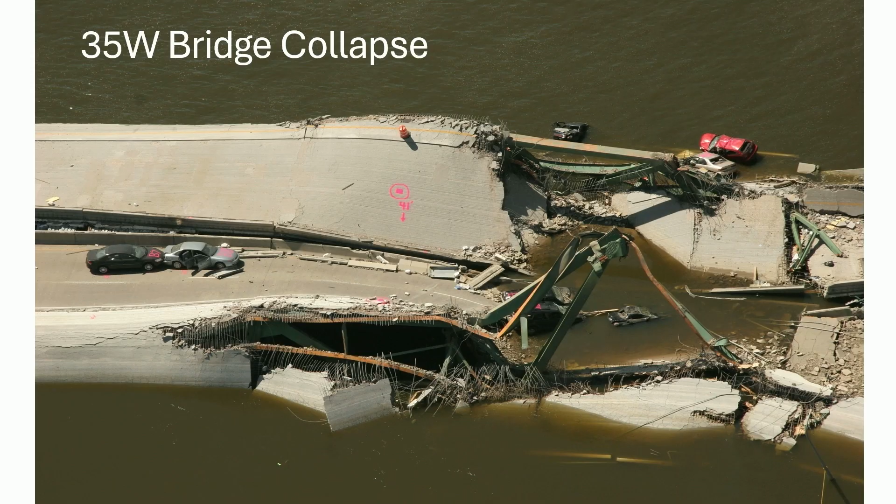Part of my background was, if you remember, we had a bridge fall down in Minneapolis. It's safe to drive on, you're good to go, and I was assigned this project. I don't normally have this kind of stormwater pollution prevention plan design, but this was weird, and part of it is that when the bridge fell down, it broke into a Superfund site that was left behind by the railroad person named James J. Hill. And it was a gasification pollutant area, and that's what we punched through, with mercury as the main pollutant of concern.

So those orange things that you see there, I'm using what's called, they called it ceramic peat, but I'm pretty sure it was biochar. We didn't have the word biochar in our lexicon, so they basically used high temperature peat, and it was designed to trap all divalent cations, and that was what I wanted.

So that was really cool stuff, and MnDOT let me put it in sleeves, so I had it everywhere. But it was only because the federal government paid for everything. Otherwise it'd have been a fight, because I didn't have it as a standard for this. But that's what I did, and that was the beginning of using three-dimensionality of things to try to remove pollutants in a flow line.

And so I need your help, and this is where I'm going to burn up some time here, but I've asked everyone on planet Earth, do you have a design manual? Do you have a design manual for maybe one topic? So we just heard maybe on some bio-retention stuff. Okay, fine. But I can't find much of anything.

And if we're going to make progress in using biochar in the world, you've got to start with good design. Because if it ain't in the plan, it ain't going to happen. You can argue all you want. You can give it away for free, and I still won't put it in. It's got to be in the contract.

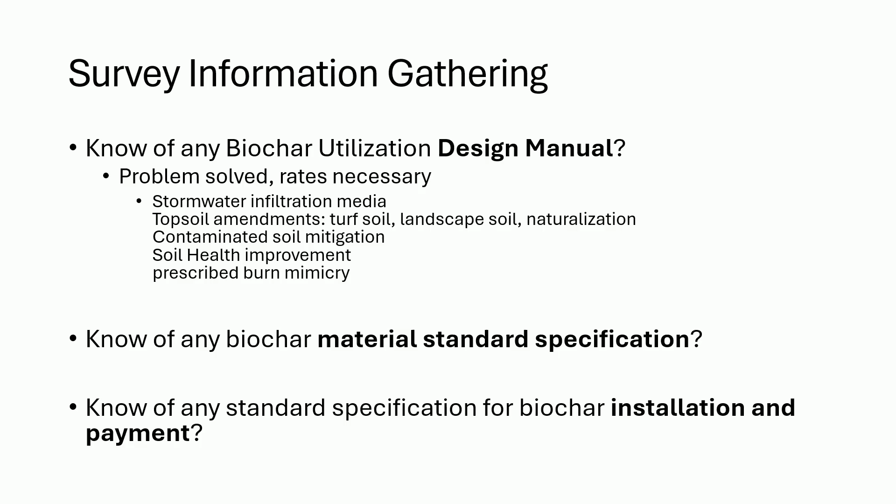I love it. Maybe it's 4 R's, maybe there's 5 R's. Righteousness might be the another R here. And so if you're interested, and if you have information, please consider talking and taking a survey.

So I've got a research project where I hired a consultant to find out if anyone on planet Earth -- I'll even take the universe, if you've got something from Mars or Venus or anyplace else -- I really am looking for: do you have anything on how to design for it? You just heard it earlier, for landscaping, for stormwater, for the myriad of things that were just mentioned.

But it doesn't happen by just love and luck. In fact, there's no love in my world. It's work, and it's called work for a reason. You don't go to love. How many came here today for love? Okay, one. Yeah, I know. A couple of you, yeah. I could use a hug, I'm telling you.

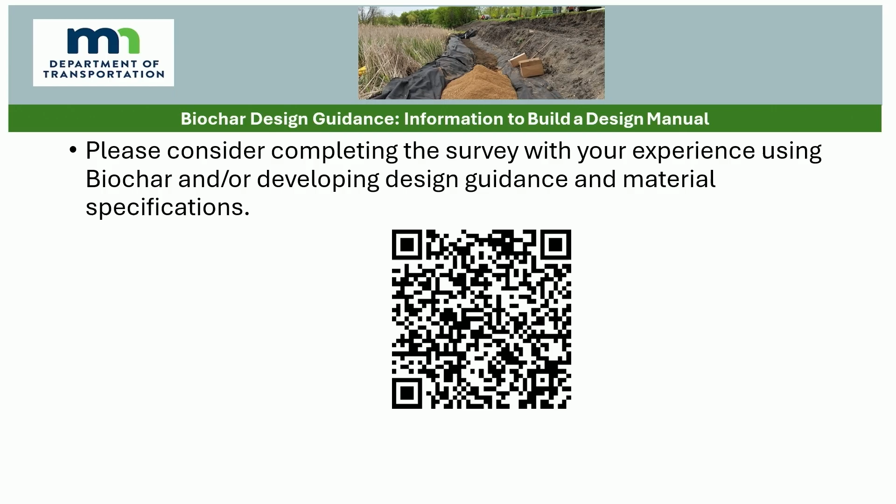So I have a spec. I don't care whether you like it or not. And the moment I write something at the DOT, y'all hate it. But you have to write something for you to hate it, right? So until I write something -- there's no specs that I can find.

So what I have is class 0. It could be grade, it could be another name, but right now I'm calling it a class. It could be a type -- men always label things. And that's no testing area. So it's the same feedstock. It's always going to be hardwoods at this point, because that's all the research I've got from Dr. Brian Berry, and we've got a representative here.

And then class 1 is maybe for road base and pavements. That might still be true. And you'll hear a presentation -- there's even someone from concrete here, maybe he left already on me. And then there's the general soil additive or general additive.

So that's class 2, and that's what I'm going to talk about for temporary sediment control. But that would be just something as a soil amendment. I'm not going to ever get credit for anything -- get over that, it's solving a problem. And if the contractor might get some CO2 credits for installing it in construction, MnDOT won't, because it's a state agency. And then I've got 2 classes of 3.

3A is nutrient-enhanced additives, that's different than just adding it to soil and hoping. And each time you'll see -- you can't read it, but I'm testing for more and more things. As you test for more things, like all the EPA heavy metals and PCDDs and all those other things, the cost goes up. And then class 3B is stormwater, and that's the highest level of testing.

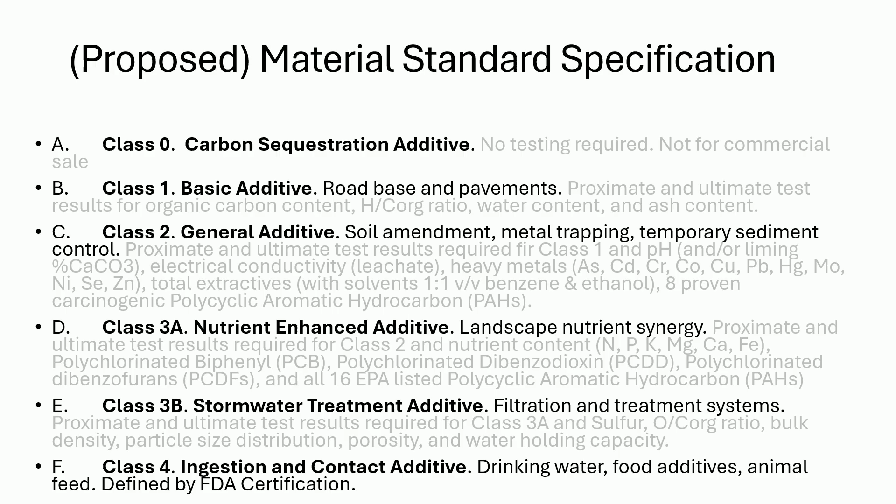Now, there's some really neat industrial things that spin, and curtain, flamey things, and all sorts of cool stuff out in the show. But most of these flame things -- no, you don't really know. But it might be just fine for class 0, 1, and 2, but not for 3. You need more data, and of course, as the testing goes up, the cost goes up. But then it's supposed to be solving a problem.

All right, so now we're finally getting into what I'm supposed to talk about. That was my commercial. You got any cool things, let me know.

And we have active systems when we're dealing with contaminated soil, so I'm using biochar in projects that have excessive contamination.

I'll say more about it. So sometimes we put it into a pond that gets contaminated, called road runoff. Copper, zinc, chromium, cadmium, everything that comes out of a tailpipe, everything that comes off a car. Over time in Minnesota we rust a lot of things, so by the time you're done driving it, the rubber's gone, the road's gone, the car's missing. It's all someplace though, because roads wear out, tires wear out. It all goes someplace, so 6PPD-quinone is going someplace.

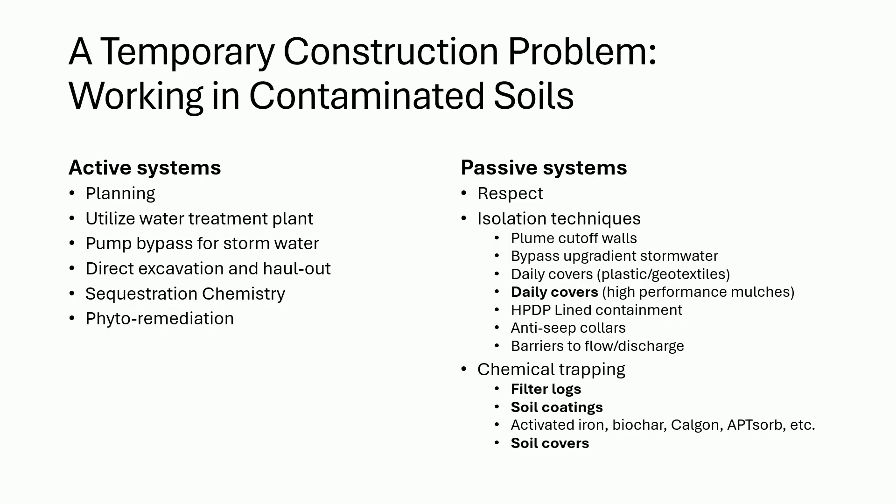Then the idea of passive systems, and I'm going to be focusing today on chemical trapping - filter logs, soil coatings, and soil covers. I'll give you a whole bunch of things I want to do or plan on doing and have no idea if they work, because I can't get anyone to research it without money. You won't do research for me for free - isn't that weird? You actually want to get a pretty good wage, not minimum. Well, it'd be fun to have Dr. Berry working at minimum wage, eh? Yeah, that ain't going to happen.

So in most projects where I've got known contaminants - we drill a lot of holes, find all the contamination, I might have these metals as an example - we label the soils green, yellow, and red. Can you tell me what you think red soils mean? Bad, you can't reuse it. Yellow is bad, but it's reusable - you can entomb it into the road base, behind concrete walls.

We're never growing tomatoes on a roadside, so it isn't one of those things. I'm not supposed to be playing there - hopefully parents are watching their children, because I don't think you should be playing on the freeway. When I was growing up, my dad said, go play on the freeway. You're all younger than that, I know, but that was his way of getting rid of me - go play on the freeway. At least someone laughed - thank you, I appreciate that.

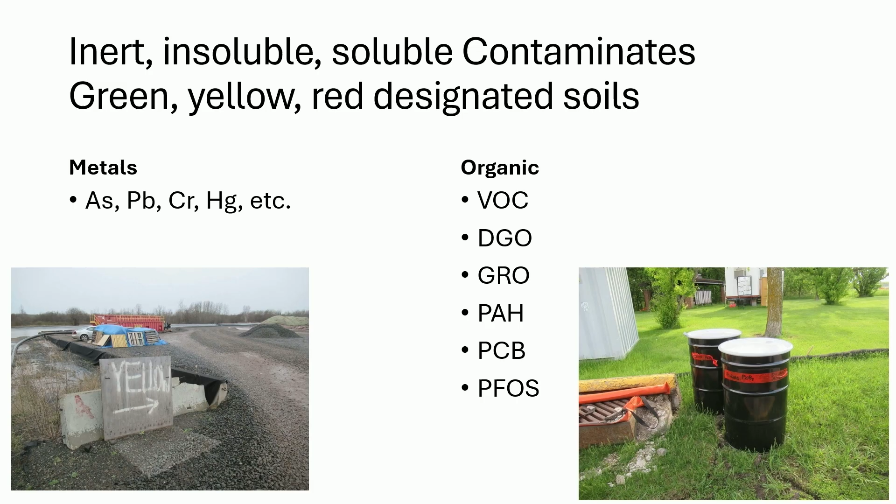So this is a sign, this is a real project. It's in the Duluth area - an old industrial corridor, railroad, and everything started at the beginning of Duluth. We have the same thing in Minneapolis. Industry started, and we didn't have a lot of pollution control, and things happened. Anyway, that's an example of what I'm having to deal with.

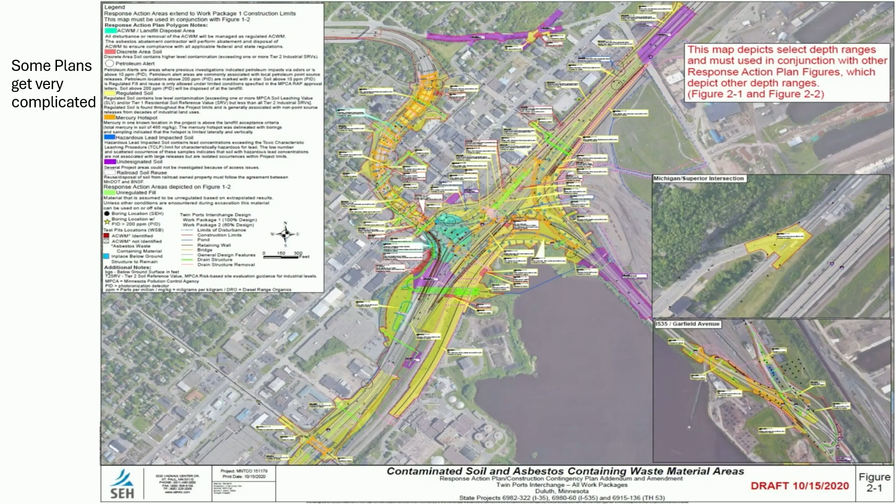And if the thing drains to a hole, the soils, if it gets contaminated groundwater or rainwater falls into it, we have to treat the water. We basically bring in portable water treatment plants. I'll show you that. But what if the water can't go in the hole?

And I know America loves this kind of thing, because it's what I see - if you don't test it, it's safe. So it's best not to know. But when we do know, then we've got to respond.

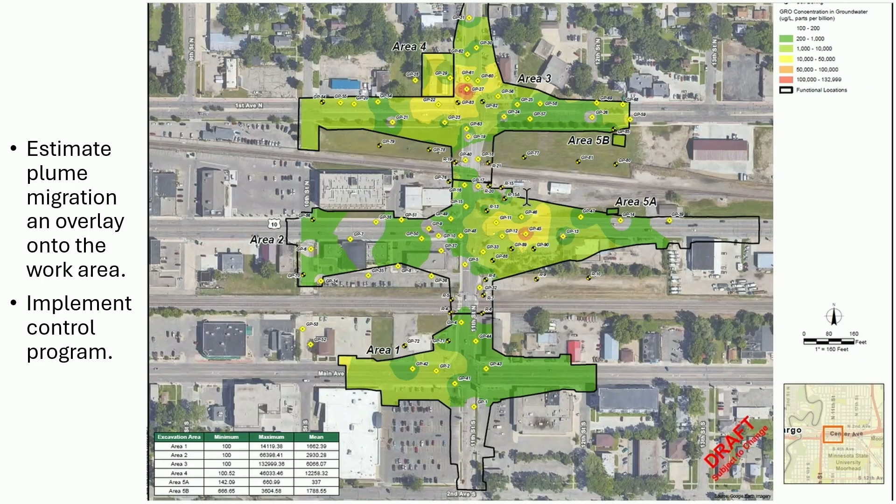So these are examples of plumes, and this is a real project - Trunk Highway 10. If you go to Moorhead, you can't miss it, it's under direct construction right now. And you know, things happen. Then you got these things that look red like a target - ooh, you know that means this bad stuff is migrating. Oh, isn't that fun? So we bring out a water treatment plant.

And the water treatment plant consists of something like this. Uses a lot of electricity, 480 volts, 3-phase - when you turn that thing on, this whole city turns dark. It's a big, a lot of energy use. But we have to go through - you'll see in here we've got sand pots, chemicals called flocculants, reverse osmosis, activated carbon (not biochar, but activated carbon), going through various settling tanks, oil-water separators. Basically what you're looking at here is $7 million. This is one project. That's just for the water we can get.

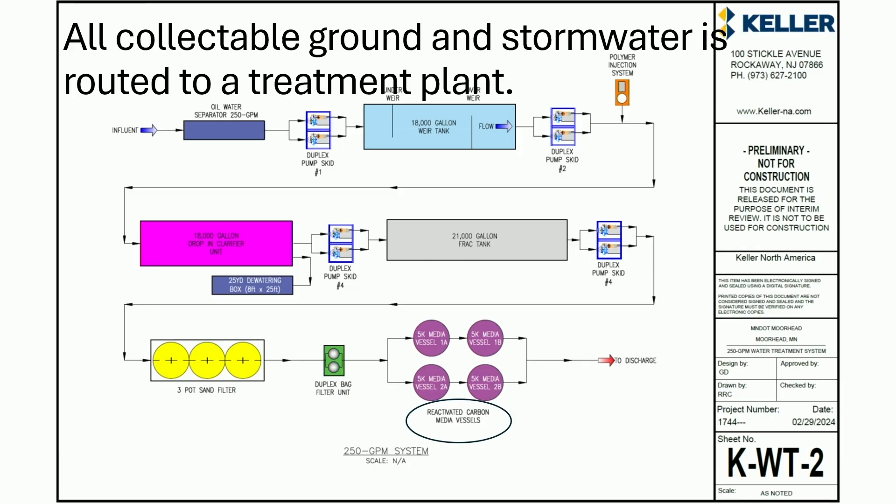So again, these are all the connected things - it's all on a bunch of trailers. It takes an expert to set it up. And hopefully when you're done, you get the water clean enough to meet federal standards to go to the sanitary system of the city. You still can't go into stormwater - it's an entirely different permit. And you guys are worried about some biochar in a farm field and a few places over here - this is my world. Now when I'm done, how many think the soils are still contaminated?

Well, some of you are shaking yes. Not all the water can be treated by putting it into a hole, because you have to drive into the project. So far we don't use helicopters to build any project, so you can't just helicopter in and out. You've got to drive in, dig soils, haul them out, and stuff falls into trucks, falls out of trucks, falls on tires, falls all sorts of places.

So I've got to deal with exits, haul roads, slopes and perimeters that don't drain back into the hole that I can pump and treat. It drains to curb, gutter, pipe, and river. And stockpiles - you don't just build, you have to put stuff over there and construct around it.

And then I have a whole bunch of other things, like the city's stormwater system, and we connect to those. We don't just have our own pipes, we connect to other people's pipes.

How many have seen a building being demolished? Or a bridge being demolished? Isn't that fun, blow the sucker up? That's so much fun. But how many think it generates a lot of dust blowing up a bridge or a building, say in downtown Minneapolis? So they use water.

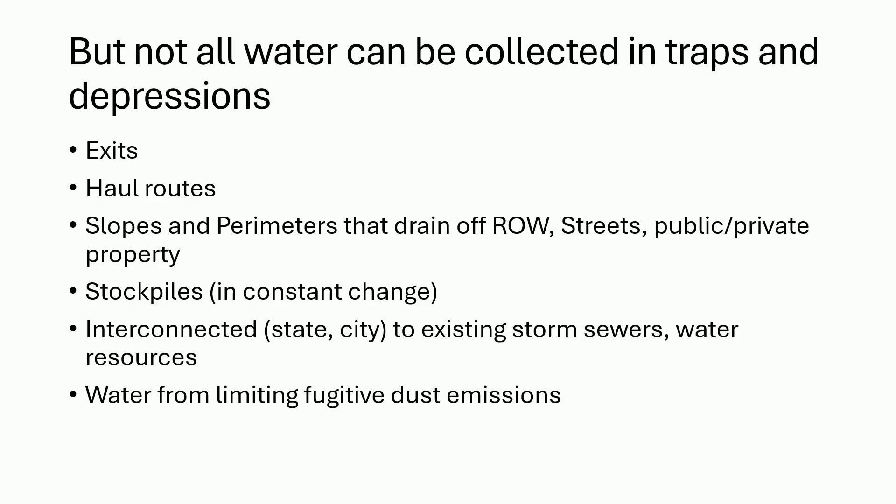But remember, that building could still have asbestos in it, mercury, and all sorts of other cool things, and then you use water. Now you've got water all over the place. And where does water go when it rains, that you've just put on the ground for dust control? Well, someplace, of course.

So here's an example - you don't know what you're looking at, but I'm going to tell you. This is an example where the yellow soils, our red soils, would go. It's a stockpile that meets EPA requirements - it's got a plastic liner, high performance perimeter control, not wimpy stuff, and a daily cover. So when you can't do a direct haul to the landfill that'll take this waste, you've got to store it someplace.

Well, have you ever seen a contractor get it all right all the time? Like it'll never rain, it'll never blow in? So plastic blows off, and things happen. Now I'm driving a truck in there and putting what kind of dirt on the tires when that's full of regulated arsenic contaminated soil? I'm tracking it all. But not to worry, I'll take a sweeper then. But no sweeper's ever been invented for construction track-out.

It's good for leaves and grass clippings. It's really good for MS4 compliance, but it doesn't do anything for dirt pickup. It's a good smearing device though - oh man, it smears good.

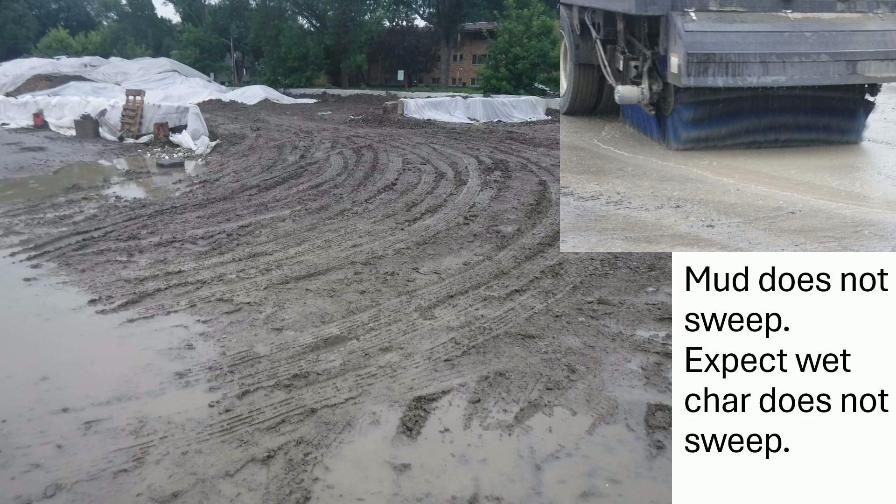So here's an example - it just happened to rain, same contaminated stockpile area. What do you think that soil consists of, and how do you think I'm supposed to handle it? La la la, live for today. Remember, I hear nothing, see nothing, speak nothing, right? So what are you going to do about it? Well, you don't live here. Whoa, that was a good one - man, that was close, I could have been contaminated.

Their children, their families - so this is where the biochar would go. It gets incorporated into these soils, and this is temporary - when I'm done, it goes back into the pile, and you haul it away and bring up some more char. How long does the char last before all the arsenic, lead, mercury, chromium, VOCs, PCBs are absorbed? I have no idea - nobody wants to test for that, so I just put some down and replace it.

Then I have a rule, but I don't know if it's a good rule - for every 2 inches of accumulated rain, you replace the media. It's a number, and I can enforce that, because we do know it rains sometimes in Minnesota.

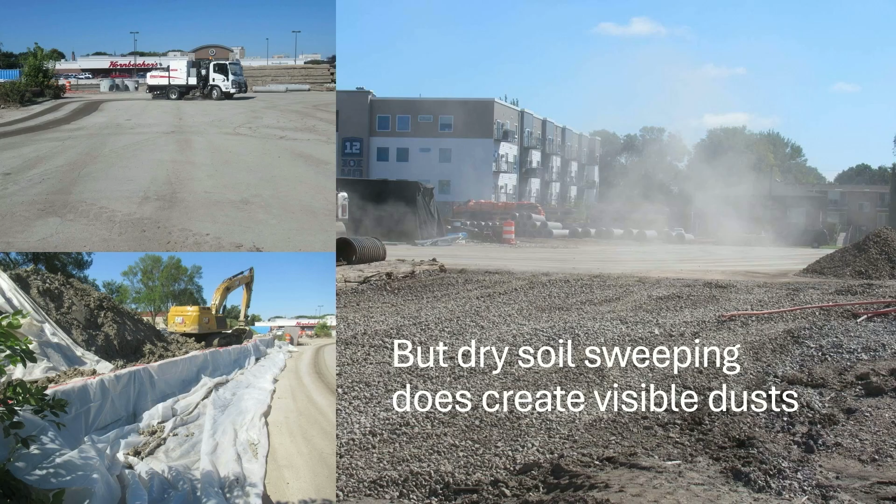Okay, I'm taking some buildings down. What does that look like to you? Is that a solar eclipse? Well, actually that's a sweeper - that's what it looks like coming out of my contaminated stockpile area after sweeping.

I'm just showing you the picture of the high-performance perimeter controls, plastic wrap, jersey barriers, all these fun things. But does that look good to you people? So then I should be using a lot of water, pre-wetting the road and then picking up. But how efficient are street sweepers when studies have shown no better than maybe 8 to 10%? Doesn't that imply that 90% of something is still getting away from us?

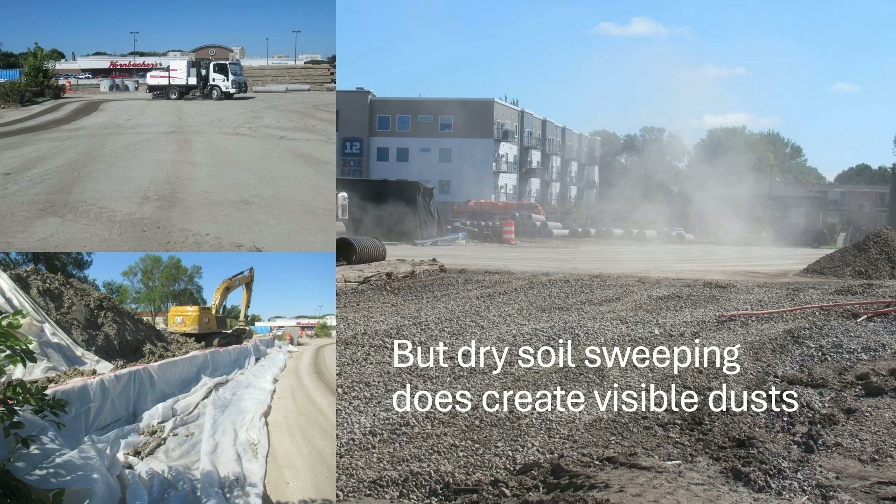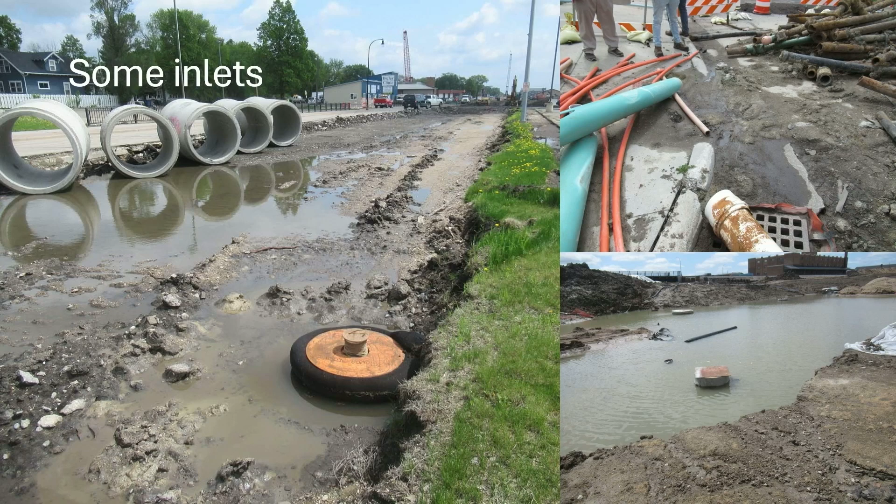And then I have to protect some inlets, and some inlets are much nastier than others, and have a lot of weird stuff that contractors forget - that pipe could be asbestos coated. No one really thinks about this, what we're here to build. There's no money in resource protection. And then I have to demolish things.

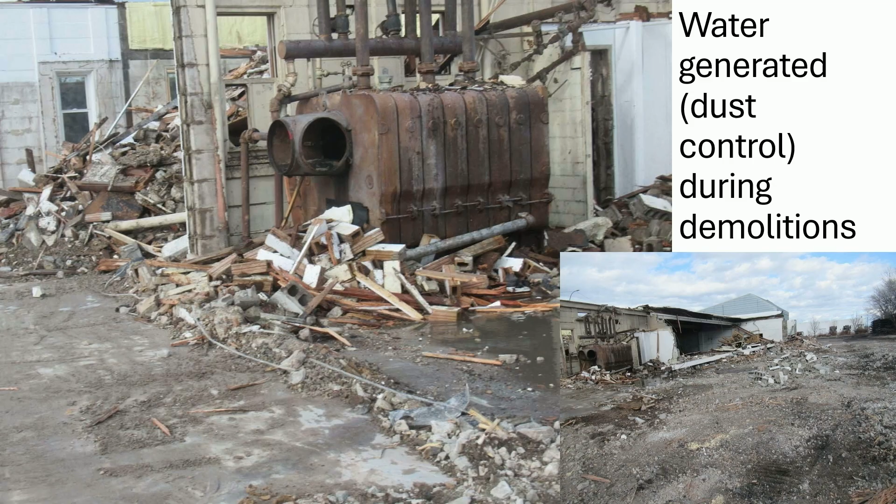How many think when you've got old boilers that you might have wonderful, cool things coating them, and then you sort of remove what you can, and then you tear the whole thing apart, haul it to another landfill that will take that kind of waste, but you still had to use water and other... Okay, now you're starting to get a sense of the problem.

And so this is where temporary - I want to say thanks to Nick. Maybe Nick, you could stand up for me, because I have to beg for good people to say, yeah, Dwayne, I'll help you. And he took biochar, stuck it in a log, and there it is, the red one. And then another Nick Ralston, who couldn't be here today, from a university like University of North Dakota - he's even willing to go and test it to see if I trapped anything. This is a dump and go. I don't know if it works, but I know doing nothing isn't an answer.

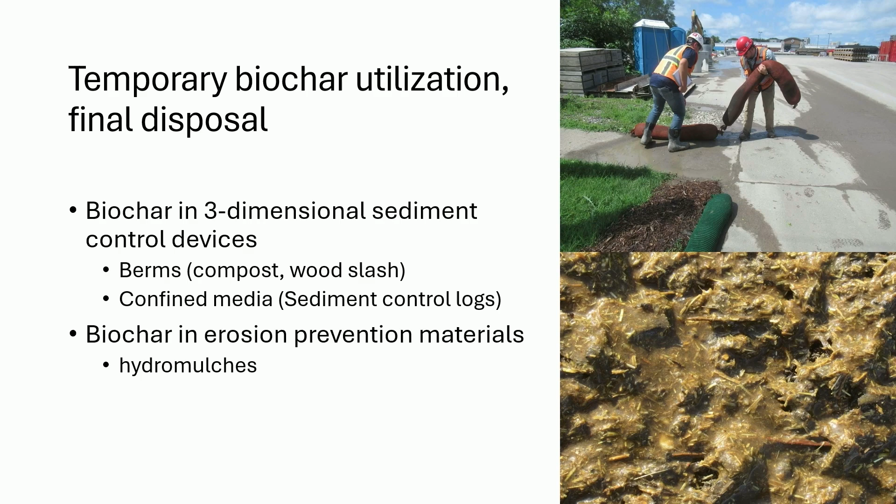So then I tried to develop what we call a stormwater pollution prevention plan, and it's an amendment. So I take those contaminated areas and try to develop how to get in, how to get out, where the water goes, and develop BMPs, best management practices, to try to absorb that pollutant. And these are the hot spots. So there's little scale things that you see here. So you might see on every one of them, it probably has arsenic listed, ethyl benzene.

I mean, just groovy things. How many used to listen to the Doobie Brothers? Anyway, I was one of the few that inhaled, apparently.

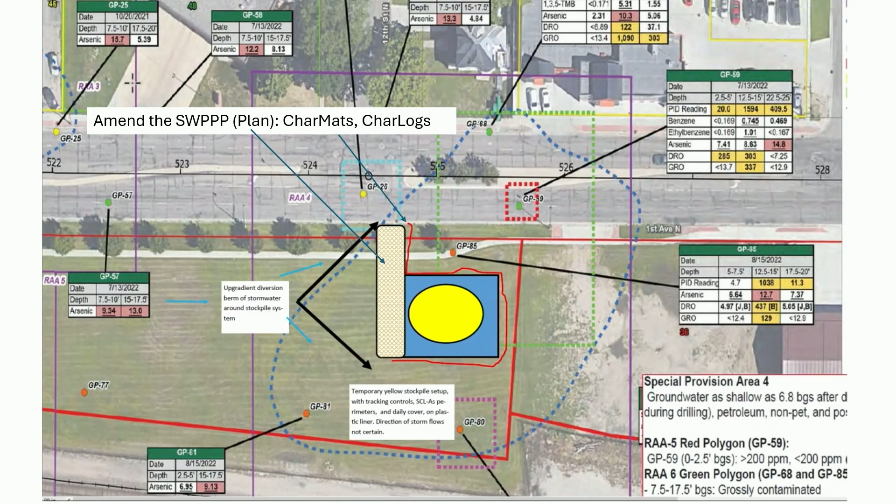As a 60s person, what I need is material performance properties, because I want to use it temporarily mixed with sediment control, 3-dimensionality. So I'll mix it with compost, I'll mix it with wood chips, I might mix it with sand, and use them as temporary perimeter control to absorb the pollutants that may be washing towards me in areas that I can't get back into the hole, where I can pump it to the water treatment plant, scrape it up, and it goes to the landfill.

So I don't know how long this stuff lasts. I really don't know whether it pulls the metals that I think it does. I think it does - evidence would say so, but you know, this is the infancy. So how many think it's better to try something than to wait? Because by the time I know, I've already had a lot of projects get done.

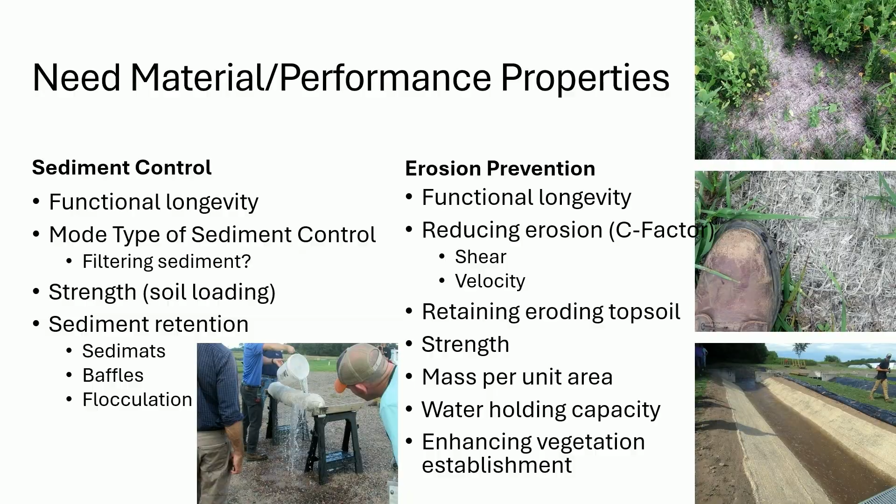So I'll start with trees, grind them up, and use them for temporary erosion control. I use it for exit control, perimeter control, all sorts of things. So the trees gave up their life. And then what I'm proposing is when I'm done, take the excess woody debris and charify it, and then put it back on the landscape.

Whoa, isn't that cool? So I make monster piles. So we have bats in Minnesota, and I can't take the trees down when the mama bats might have baby bats and doing mama and baby bat communication and bat stations. No one watched Batman either. Stay tuned next. Well, anyway, so I use it for a lot of things, everything.

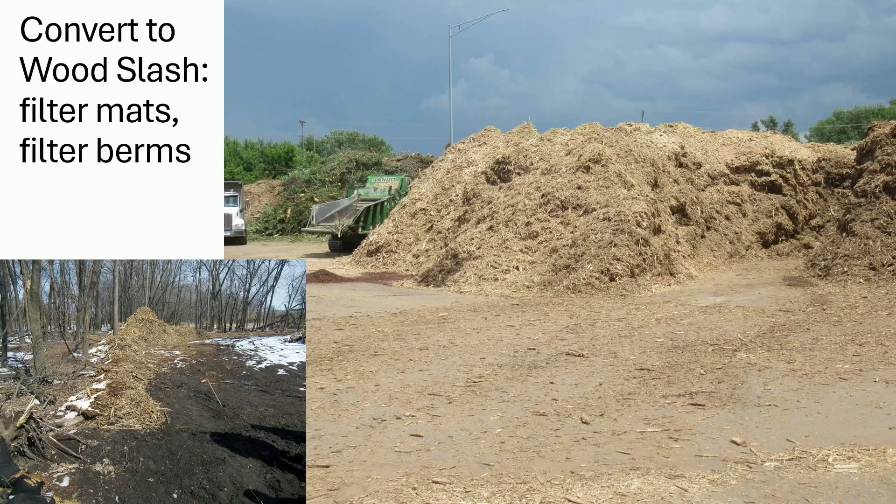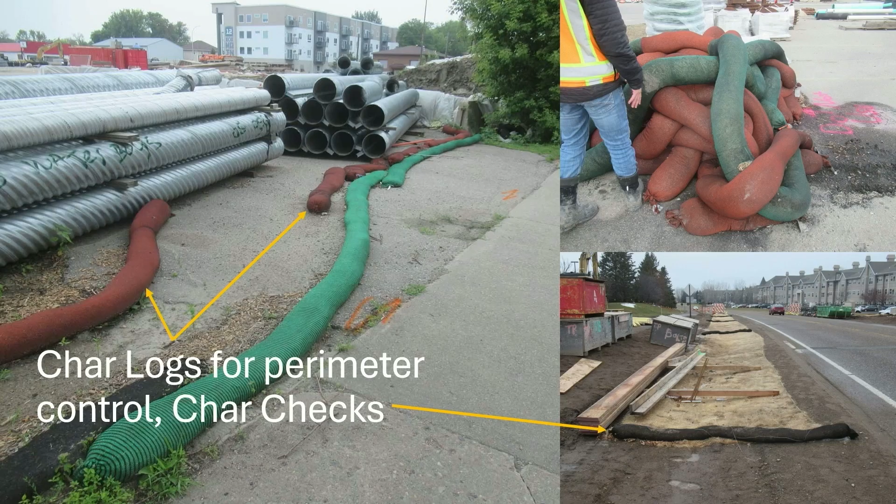So trees gave up their life, used for temporary control, incorporated into the soil, and then charified. The next idea here is soil amendments, but for me, I'm using that for the engineering controls, specifically perimeter controls. So the green one, and the black colored ones which are just fabric, are the wood chip ones, and the red ones are the biochar enhanced sediment control log.

I want them in front of the sediment control, since these are pollutants along for the ride. In theory, if you were able to remove the sediment load, you should be removing the heavy metal. And if it's organic material, I hope the wood chips absorb the gasoline and diesel, and the bugs would just say, oh food, baby, you've just fed me. That char just comes alive with the organisms. Can't you just hear them? I didn't say I was normal.

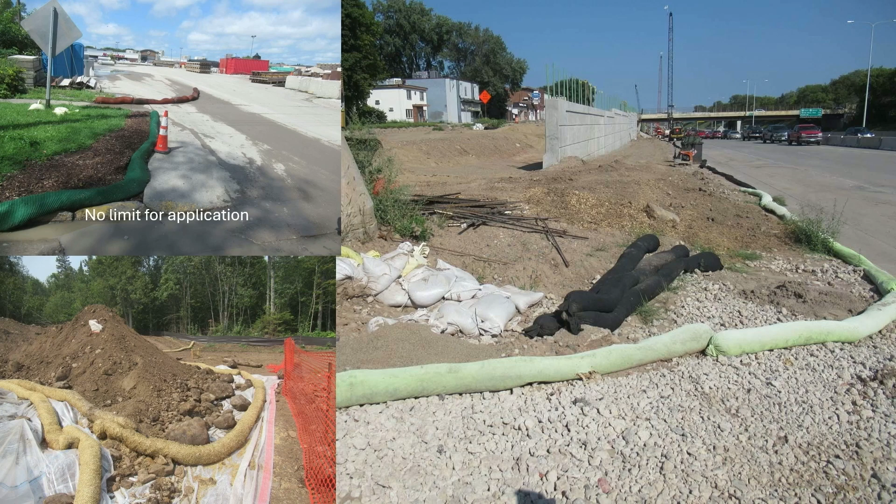So just an example, regulated soils, contaminated soils, and trying to put these logs in strategic locations to treat that water before it ends up in a curb gutter. In all cases, it's going to a resource, like the Mississippi River on the big picture, the Red River in the upper left, and one of our rivers in the northeast part of Minnesota, part of the Gunflint Trail.

So then inlets, and this is where I need help. We want to talk about innovation. Could we take char and put it in a pillow, put it on some sidebars like my little doodle here, and use that as an inlet insert, a char-absorbing filter that would catch the pollutant that sneaks through the inlet, got away from my ring of biochar life, and still have a char-absorbing material for liquid spills or volatiles or something. Because that's my last line of defense.

Once it's in the inlet, how many think it's lost? How many think it's never recoverable again once it's in the conveyance pipe on its way to the river, wetland, lake, whatever you have, or the Chesapeake Bay? Once it's there, good luck getting it out.

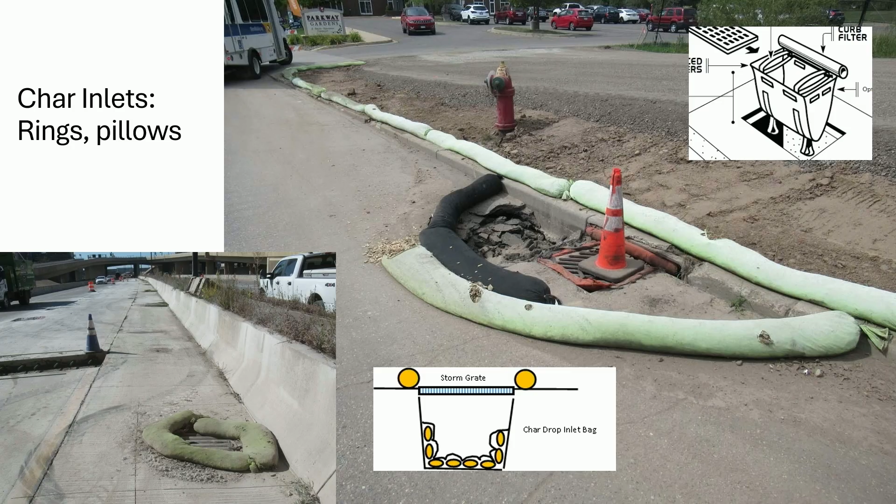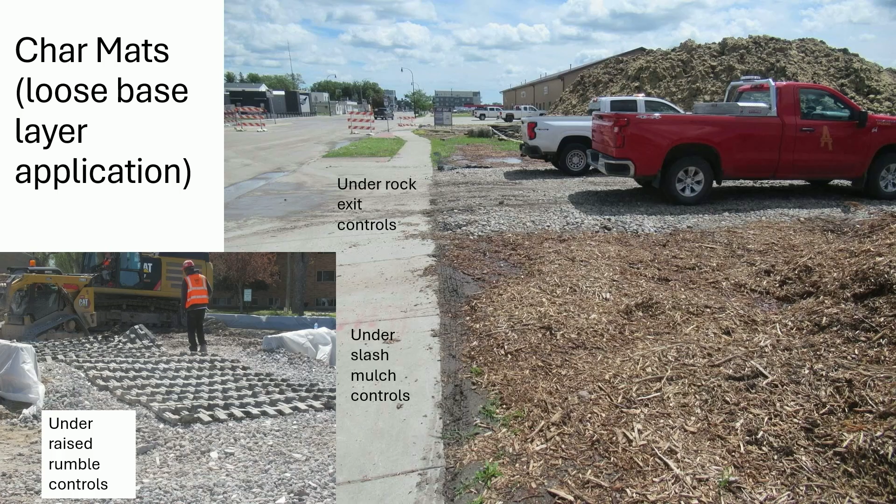We know we can't. So then how about could I use char mats? You're looking at exit controls, could I add the char layer and keep adding it? The exits wear out, but could I keep adding char to the layer? Not that I'm doing much, but I'm not hurting anything either, because I at least know that it is char and it has a pH. So could I add that material to rock exits, slash mulch exits, or the commercial truncated dome type exits? And the answer is yes.

Now shifting gears, because it only gave me a little bit of time here. Can I take multiple interesting fibers and put char in it for temporary soil covers? So when raindrops hit the earth and splash, I'm preventing that, but if it did splash and detach metals or some other pollutant, it's staying locked into the mulch cover. Could it be done? Well, I'm already doing it. Industry is already doing it.

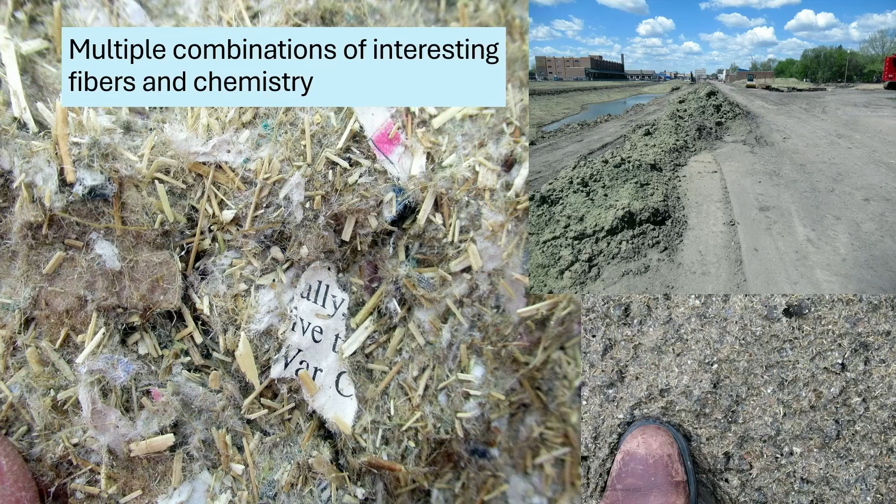So you might call them, fun name, char mulches. I'd give it a really scientific engineering name, but I want a char mulch. I don't want that straw mulch, I want the char one. You heard earlier that they take wheat straw and make a char out of it. Then you put it in a mulch and add some other things like glues and so on. But now to outdo all of you, which is really cool, some of you talked about this, hydrochar.

It's a liquid, and I'm adding a flocculant and hydrochar, and that's the intent. Now, these are exposed soils, I haven't got them stabilized, I don't have anything growing on them. I've got to build that thing called the road. It's the whole point of being here, building that road, getting the bridges in.

But I've got to stabilize the soils, and I can't always get it to the water treatment plant. So this is a way of perhaps locking that soil where it is, because I can't dig to the center of the earth, I'd hit the iron core that's molten, and next thing you know I'd have a volcano coming out in Minnesota. So you can't dig these pollutants out completely. The idea is, can I keep them there and then entomb them with the topsoil? You may not like this answer, but what do you think I'm supposed to do with it? Any idea how much it costs to take regulated and contaminated soil someplace else?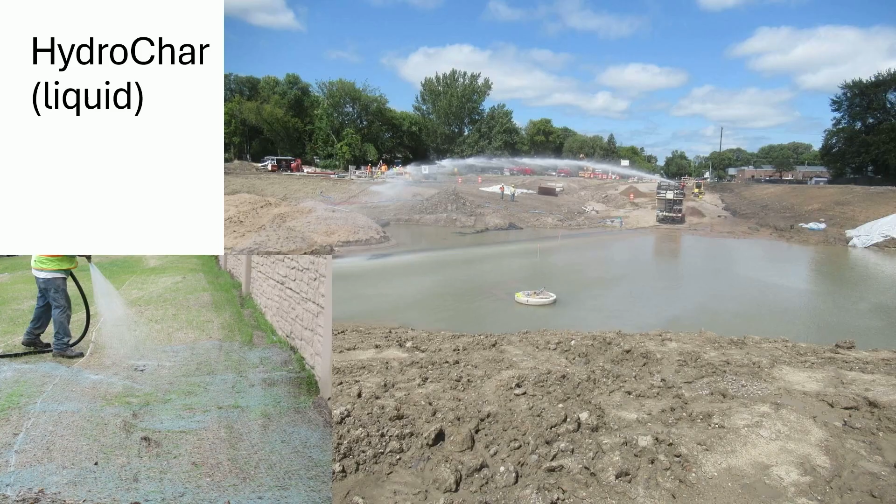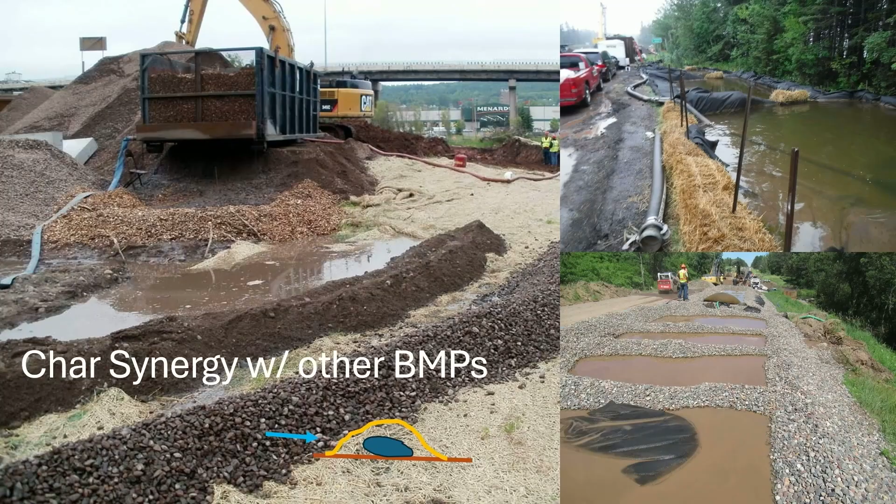It's a strange expense, but I use char for dewatering filter media. These are different things—I could add char into logs and water goes through it, combined with other chemicals. It isn't just char alone, it's char plus a suite of things to deal with arsenic, mercury, VOCs, oils, and all sorts of things. I could take char logs and add them as synergy with other BMPs.

There might be a log right into the rock to keep it from floating away, or it might be blended into the topsoil. All that eventually gets disposed of. For dewatering, water goes through a series of baffles, and char could be the baffle material—but it has to be something I can buy, put in there, and verify whether it worked. Everything costs about $250,000 to $300,000 to get two years of study, and in the meantime, the world has gone on.

This is an example of layer dewatering, where we use fabrics, rock, and flocculants. This is where char hasn't gone in yet, but it would go in one of those layers—rock, geotextile, wood chips, a whole bunch of layering to dewater before it goes into the stormwater inlet, which connects directly to the Red River.

Right now I use logs, but it'd be nice to use raw char as layers. This whole thing comes apart, and even if it worked, and even if I didn't pick it all up and it ends up where I'm growing sod or native grasses, is it the end of the world?

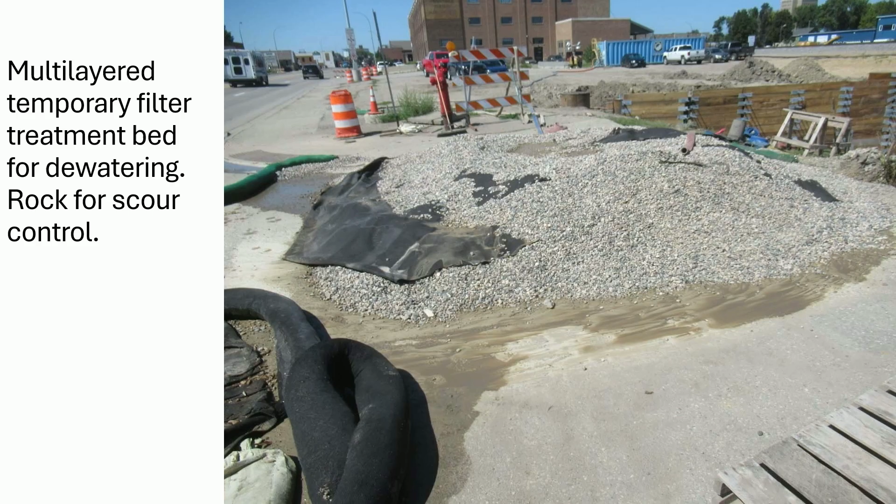You say no. It isn't—and I even have a device that looks like this.

This would be adding that same media we talked about. You asked what rate—could I take something like that and have the icky water go through an upwelling sand filter, then spill over the top, maybe with another char log as part of what I'll call the flow stream or treatment train?

How many think an upwelling wetland using char would be pretty cool? Literally taking the dewatering dumpster—done it lots of times—and forcing the water up through sand filter media to remove the pollutants of concern, the ones we already know about.

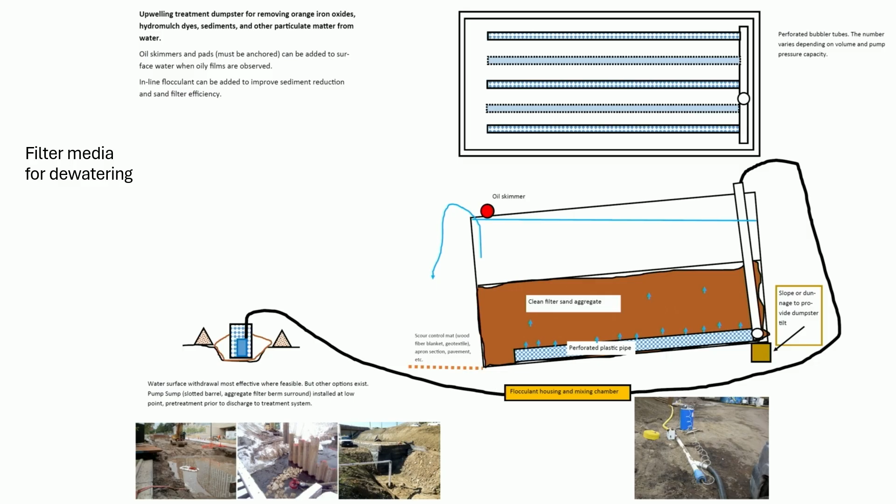Now this isn't temporary—I really like using char for permanent stormwater quality, and this is actually building your rain gardens. This is literally an example of the proposed media. We put it in a 55-gallon drum with no bottom so it can drain.

We run water through it to verify the flow rate before putting it in the hole. There's drain tile, then rock, like an umbrella. The whole thing gets filled up, and you never know what we did because it's all hidden—but the point is, I've got to verify it works.

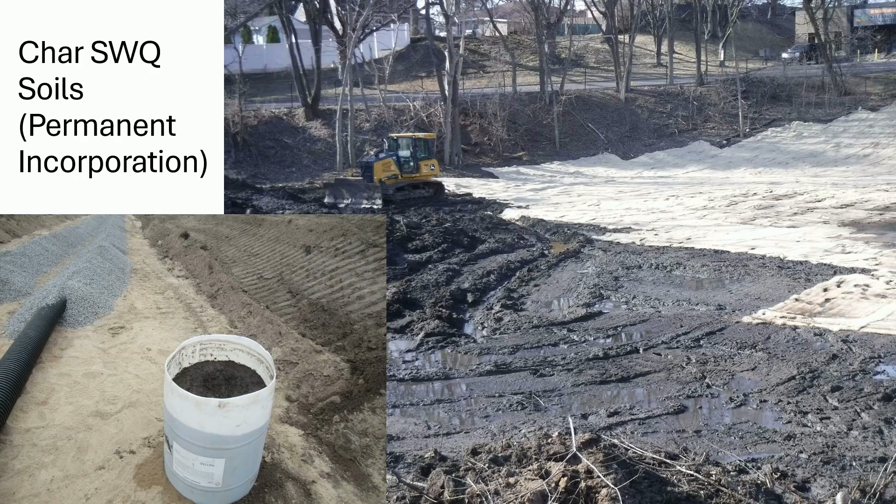Oh, he's telling me to go faster. So I'm going to use it—this is what I'm proposing.

We're proposing to use it as an in-slope absorber. For the first 12 feet—I only get about 1,200 miles built every year, so 1,200 miles, 12 feet wide, 1 inch thick. Wouldn't that be a lot of char?

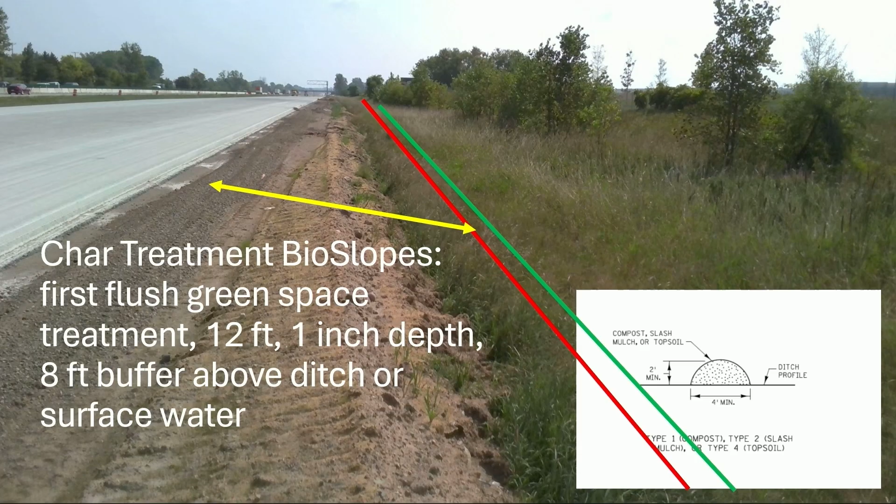Just trying to show how char could be added into all sorts of groovy cool things—compost, vegetated riprap, and so on. Ultimately someone has to write the spec, do the engineer's estimate, and migrate the material into a standard spec, because I'm out of money.

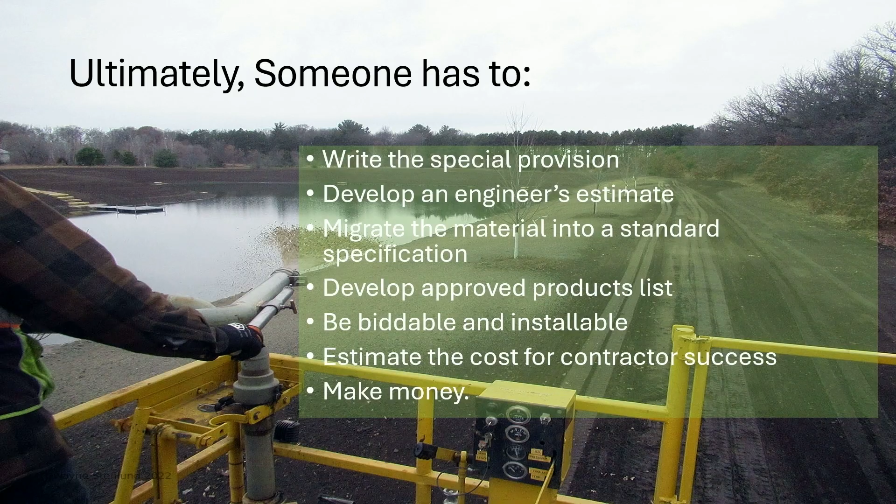And someone actually has to make money. Isn't that weird? We live in a capitalistic thing—we should have money. And if you haven't seen this, here it is again. Then I've got to go.